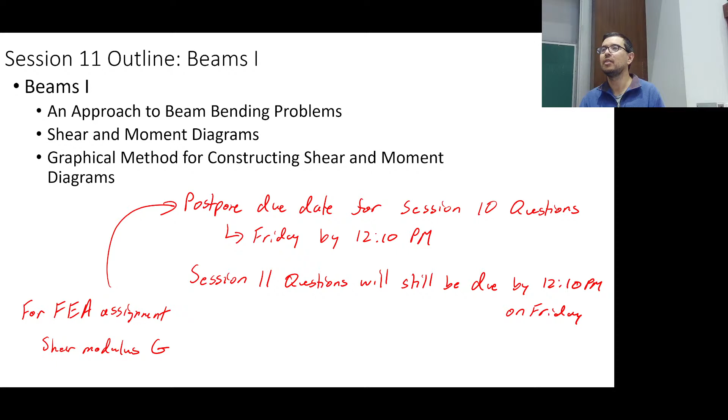Yes, Brennan? Do you take a nu value that matches to it? Yeah. So what you're going to do is use the equation G equals E over 2 times quantity 1 plus nu.

So go ahead and pick an E, an elastic modulus, something that might be, let's just say you pick 200 gigapascals, hypothetically. What do you got to do? Well, then you got to solve for Poisson's ratio, nu, using the G that you already have. And when you do that, then you can plug in your elastic modulus and your Poisson's ratio.

I got, I think, a little whiff of lunch. All right, so today, moving on, any questions on that? All right.

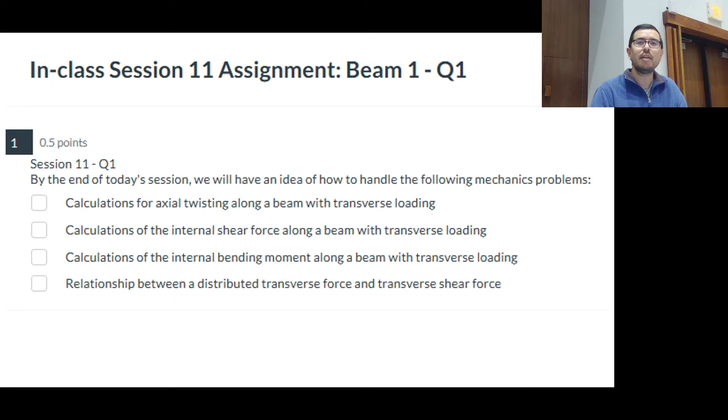You'll be able to calculate the internal shear force along a beam with a transverse loading. You could already do that, hopefully, because you were in statics. So today it's maybe a little bit of a review.

Hopefully some new insights: calculate the internal bending moment along a beam with transverse loading. Yes, that's something you've already been able to do. And we'll talk a little bit about the relationships between a transverse force and a transverse shear force.

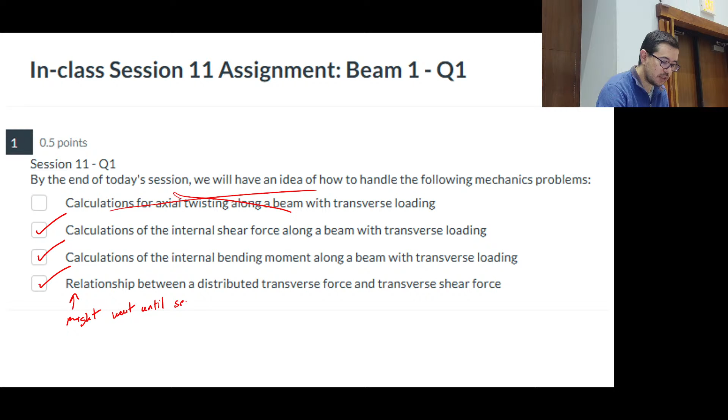So why not? Okay, so those will be, to be honest, we will cover that. Yeah, that might wait—that might wait until session 12 for more detail. But this is the path we are on. No, we'll cover it today. Yeah, we'll cover it today. Well, let me edit that—we'll say more detail to come.

Yeah, we will do that: distributed transverse force, and more detail to come, we'll say.

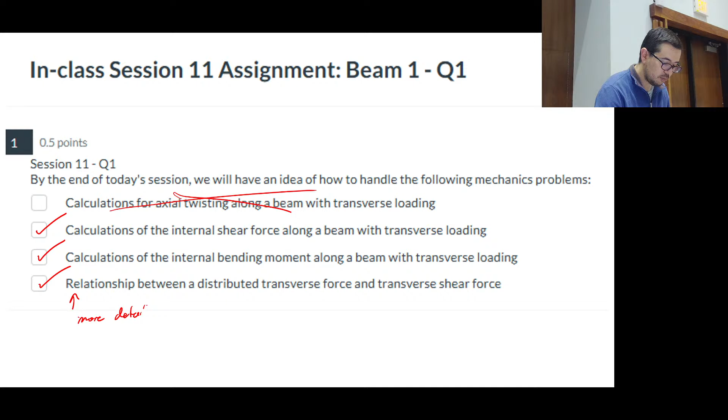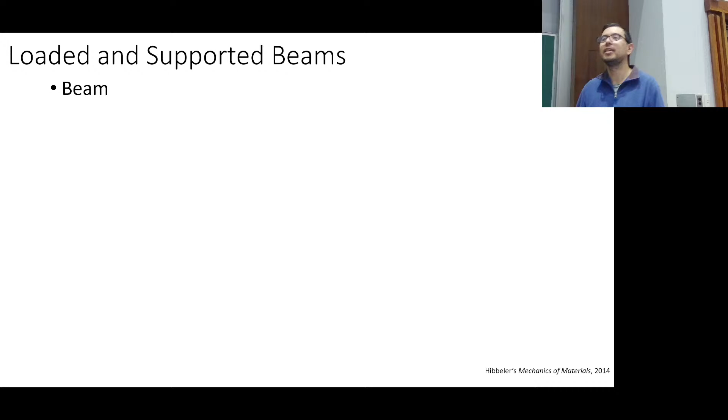So, what is a beam? If you think of a beam, how would you define it? You've spent a whole bunch of time with them in statics, so what is your definition of a beam? Essentially, it is a long object with a small cross section—we say typically that the length is much greater than the width and the height. That's how we define a beam.

It's like, oh, I go home and I see beams, or I use beams all the time. Your house, probably, if it's got a wooden truss and structure, has a lot of beams in it. Even the dorms, with a lot of concrete, have steel in them too, right? So there are a lot of beams in our residential or dormitory type life settings.

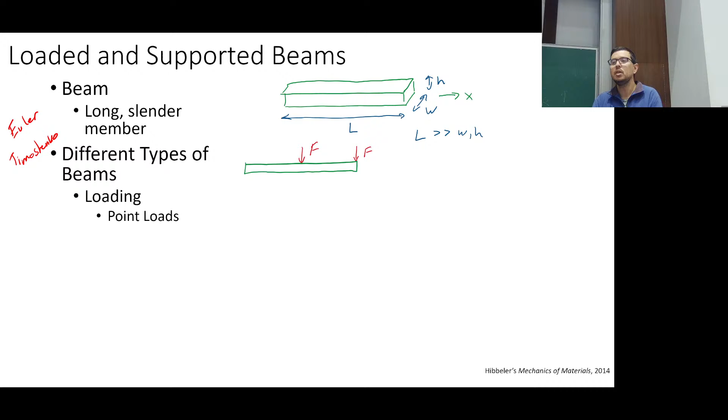The different types of beams we can consider: point loads are familiar to us. These are transverse, meaning they go through - they're orthogonal to the axial direction of the beam.

We could have an axial load as well, but we're not going to focus on axial loads in beams, because what is that? That is just a uniaxial loaded bar. But when we get to combined loading, you'll have systems with uniaxial loaded bars that are also under bending with transverse loads.

Distributed loads look something like this. I drew this distributed force, W, upward just because in our conventions, that would be the positive direction for the distributed force. In reality, gravity usually acts the opposite direction, so we often have a negative W when we do these problems.

So now we talk about the supports - those are two ways we can load it. Another way we can load beams is by applying a moment at some location. So that's not really shown here, but we can have a concentrated moment externally applied as well for the loading, although I don't have a drawing for that.

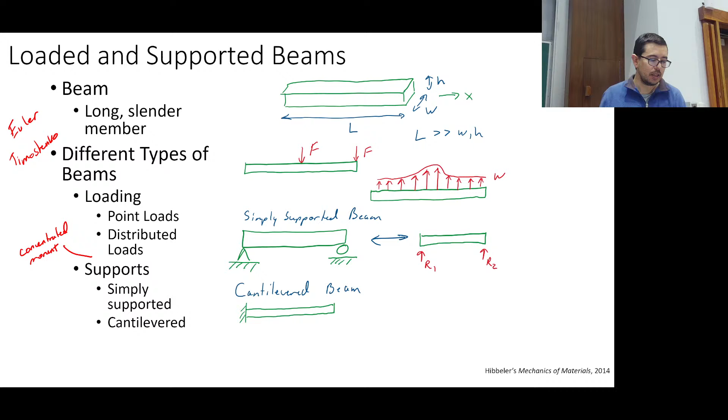The cantilevered beam is your classic beam on a wall, and then you can describe the external loads on it as such. That's what the wall does - it provides a reaction moment and a reaction force. If I were to put just a pin on this end, that would obviously mean the beam could just spin, and that's a problem.

So a cantilever beam needs to have a reaction moment, it needs to have a supporting force. An overhanging beam can be something where essentially we have a wall constraint and a roller constraint, or some type of - again I would probably put a pin somewhere along it, but that's technically not appropriate. Any questions on these different types of beams?

Yes? Is it appropriate to say a beam is technically anything getting a transverse loading? Yeah, and you know, I mentioned the plates a few minutes ago - this table is not a beam, because it's got so much width to it as it's going across. Can I make some approximations? Sure, but that's more of a plate. Here we're constraining ourselves to the idea that it's small in the 2 other dimensions.

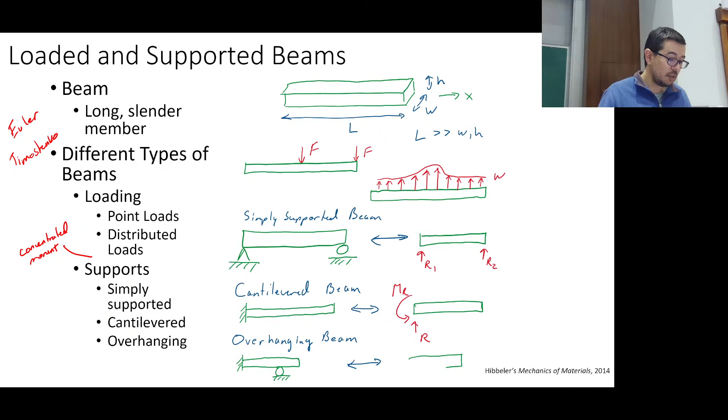Amazing things. If you think about flight, especially in aerospace engineering, it's just absolutely amazing to see what they did.

Okay, so section of a slender member. There is a member. It is not that slender, given how I drew it, but you get the idea.

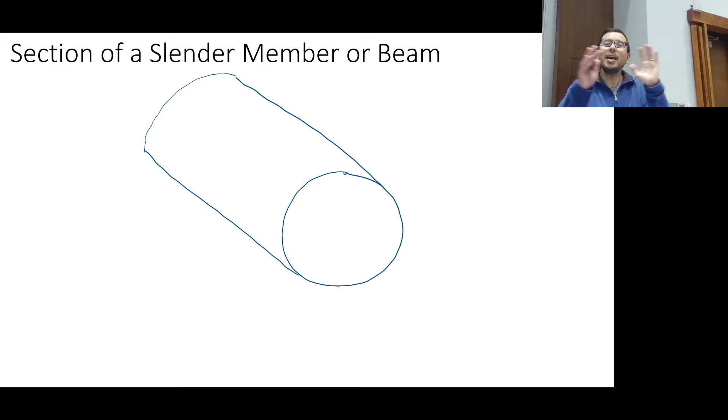So if we think of the internal loads here, what could we be talking about? That's a very vague question. Let's imagine that this is one of my slices, the way I draw my slices, right? And I'm looking at it, I just sliced the beam, and I'm looking at the open face.

What do I see if I want to think about the internal loads? What are my options? This is now not just transverse loading. I'll take whatever type of loading you can imagine. What would I see in that slice?

Yes, shear. Okay, so I could see shear. Very good. All right, so let's go one step further.

Now I give it a coordinate system. Okay, and yes, this is pre-programmed. But we're not talking about stresses here, right? We're talking, there are only two types of internal loads we're going to discuss right now. One is moment, one is force, okay? So what would a shear force look like, and how would I draw a shear force here?

Yes, so good. I would draw it parallel to the face, something like this, parallel to the face, and maybe in the y direction, maybe in the x direction, maybe in some other direction. But I wouldn't draw it if it's a pure shear force, I wouldn't draw it in the z direction, assuming this slice is in the xy plane.

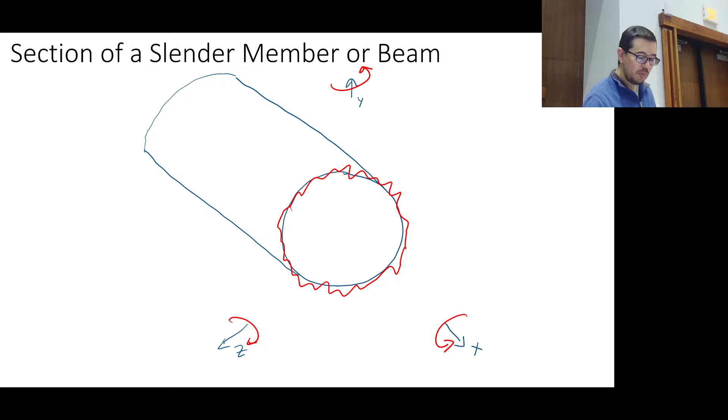And you're also getting at something where I could have torques. I could have moments that are causing essentially bending or twisting. So the way we think of X, if you think about a torque here about X, what is that? That should look familiar, right? That's torsion, that's just twisting this thing like we've been doing. Okay, if I have that, so that's this one.

What are Y and Z? Think back to your statics. What are they really? Yes, bending. Yeah, those are internal bending moments.

Okay, we're not drawing the nice 2D diagram here, right? But if I were to slice this thing like this, okay, this could be - and I say that Z is coming out of the board - that's just an internal bending moment, that's this one right here. And then this one is about Y, an internal bending moment about the Y-axis. Okay, so very good, very good.

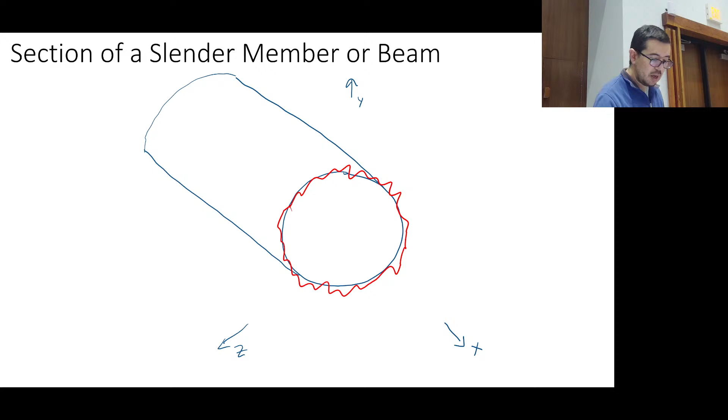All right, so let me just put up the pre-programmed thingamabobber, all right? But I will add that, yes, the slice shown is in the YZ plane. Sorry about my mistake, won't be the last time this semester.

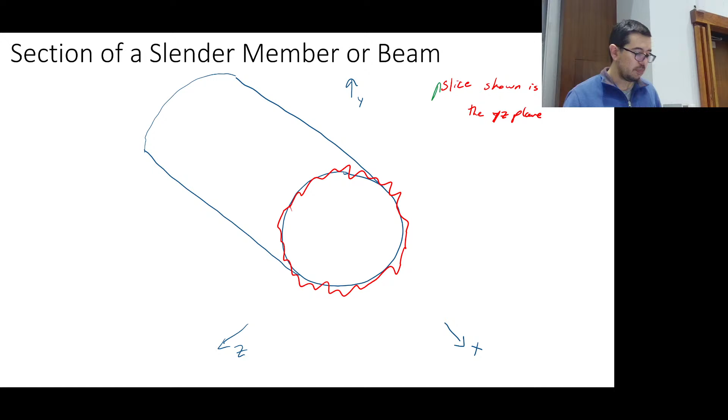Okay, so we've got axial force, Fxx. We've got our shear forces, Fxy and Fxz, right? We've already seen this - I remember these orders do not matter too much, but what we're saying is... oh my goodness, that's the X face in the Y direction. That's correct, and this is the X face, this is the X face in the Y direction, and this is the X face in the Z direction. Okay, those are shear.

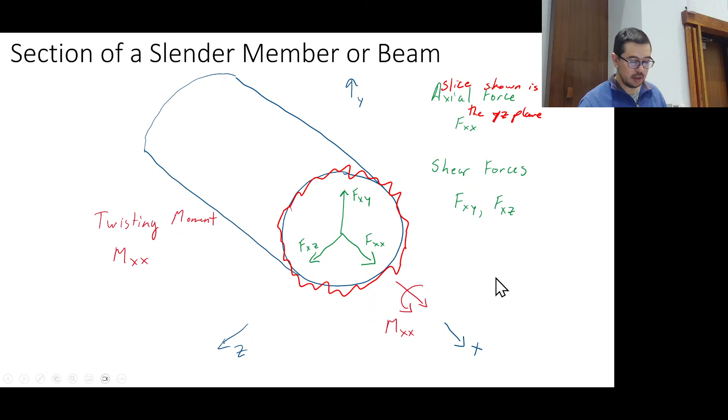So those are our shear forces. We can have a twist, which we call MXX, or MX if we'd like, and that would be similar to the torque that we've seen. And we can have our bending moments, MXY and MXZ, like that.

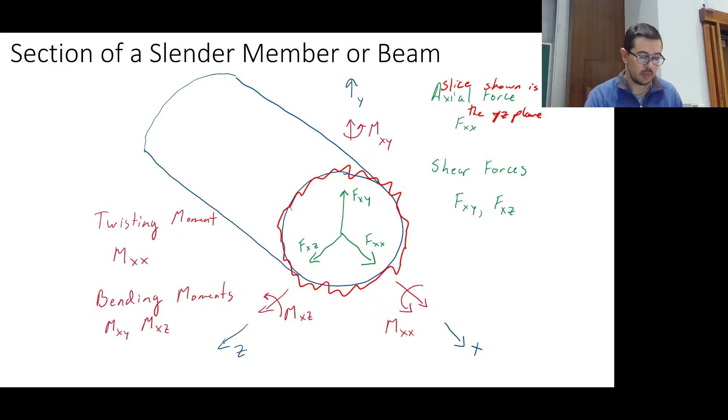So, what's happening inside the beam? We can have varying internal shear forces. We can have varying bending moments.

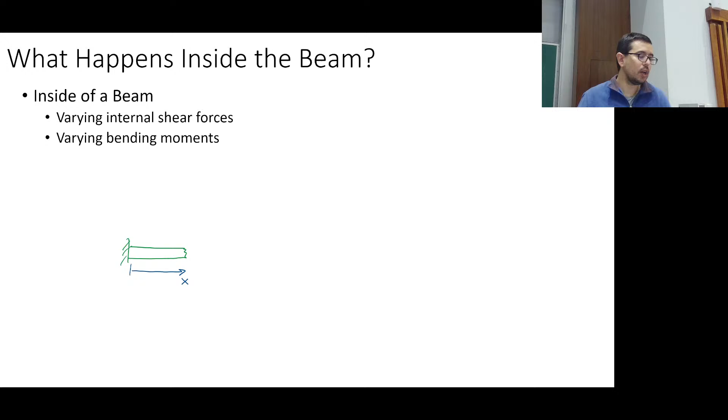So this is now jumping to the idea that we're dealing primarily with 2D structures, and we do not have twisting. So we're saying no twisting, and we also do not have axial loading.

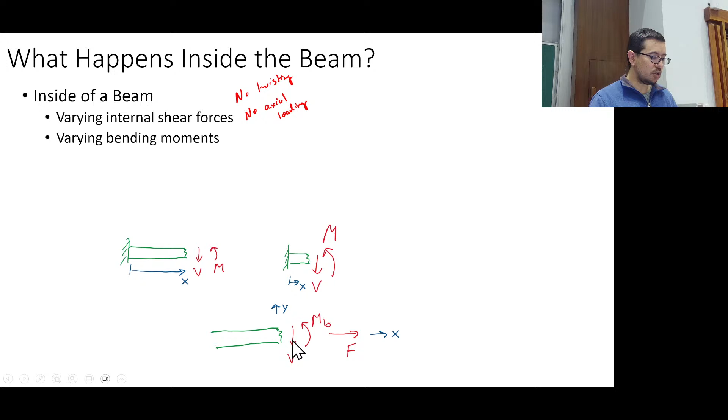So here, what you did before, using the convention from Hibbeler, is you would draw an internal shear force, which we give by V, and an internal bending moment, M. It's important to try to get the convention straight so that V is down this way and M would be going up like that. And yeah, we could have an axial, but let's just say we're not thinking about that right now.

Any questions on this convention? We've already talked about this a little bit. In terms of, if you have it open to the right, then V is downward. If you have it the other way, and we'll do this again, it won't be the last time, V is up and M is this way.

So Crandall, Dahl, and Lardner also have an approach to beam bending problems. We've talked a little bit about their approach to static problems, where we have equilibrium, geometric compatibility, and constitutive relationships. If we look at CDL, they also essentially have a 3-step process for handling just equilibrium.

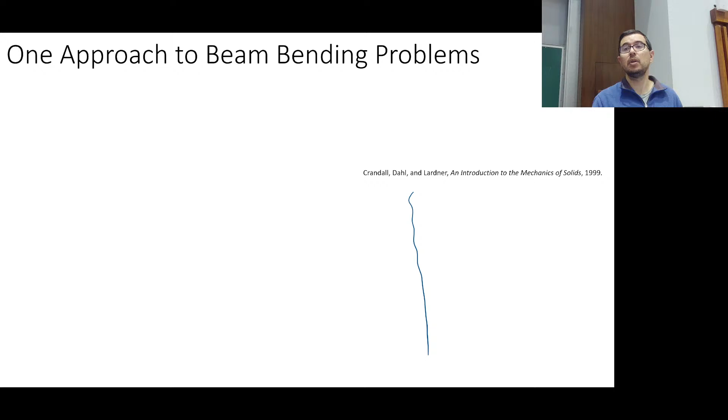So you are going to create the model, and that's you kind of, I don't know, that's you want to do that. Idealize the actual problem.

And actually, this is not super trivial in that, so as we were undergoing our ABET accreditation, one thing ABET wants us to keep track of is certain student outcomes, and there are 7 student outcomes. The first one, if you look at the syllabus, you'll see different student outcomes listed, and the first is the ability to identify, formulate, and solve complex engineering problems. So this goes right along with that.

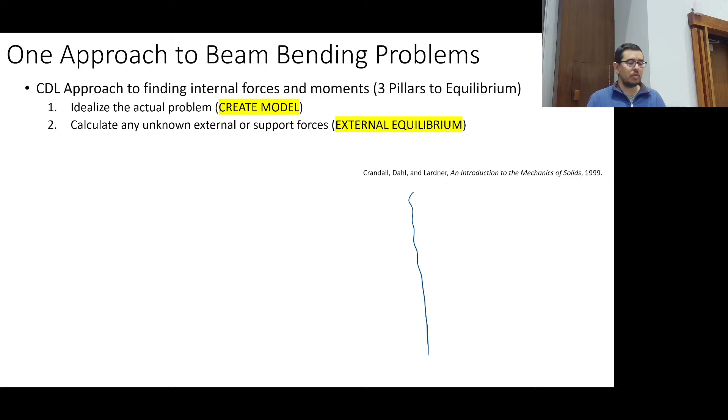We want to go ahead and identify what the problem is. Then we will use external equilibrium—we've talked a lot about this—and then we will use essentially the method of sections.

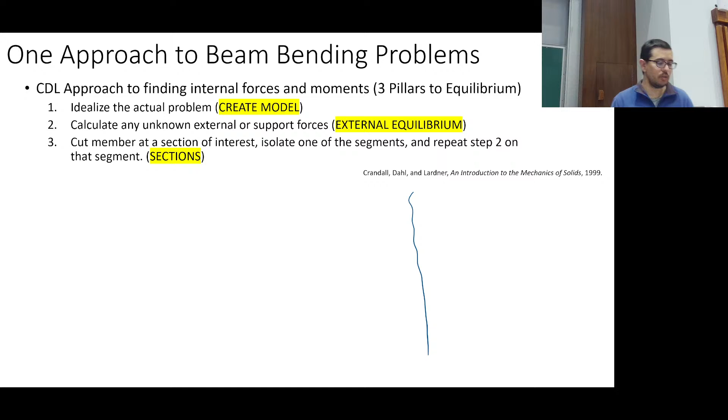So these are not earth-shattering approaches to beam bending problems. I think you've probably already used them in the past, but this is just a reminder. So creating a model might look something like making a drawing, putting a load on, doing a better job of describing your coordinate axes than I've done here.

Then also putting forth what the corresponding external loads would look like in terms of vectors. And then we can move on to external equilibrium, where we write out equations. So we know that R and P are going to be equal to each other here.

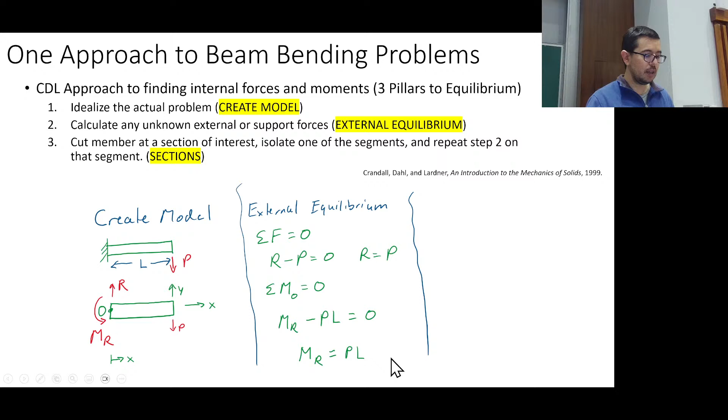And we can then select a location about which we take the moments and sum them and set them equal to zero. So in this case, I've gone ahead and specified this point O, and that's where we're taking the moments, and we have here—you've seen this a lot of times before.

And then in terms of sections, we take a slice and we look at the internal shear force, V, and the internal bending moment, just like you have here. Any questions about that? Any insights that you might have that would shatter my world?

Does anyone like beam bending problems better than other types of problems we've covered, like torsion? No? I don't know, I think I like beam bending problems better than torsion problems, to be honest. But that's just, maybe it's just me. I have issues knowing which direction we're going.

All right, and yes, we can go ahead and solve for the internal shear force, V, and solve for the internal bending moment. We'll do more of this in the future, but you've been familiar with creating those shear force and bending moment diagrams, where you say how the shear force is varying across the beam, and how the bending moment's varying across the beam. This is just getting us started. We do have a nice expression for V, and we do have a nice expression for M, and in this case they just happen to be constant. So that's very nice.

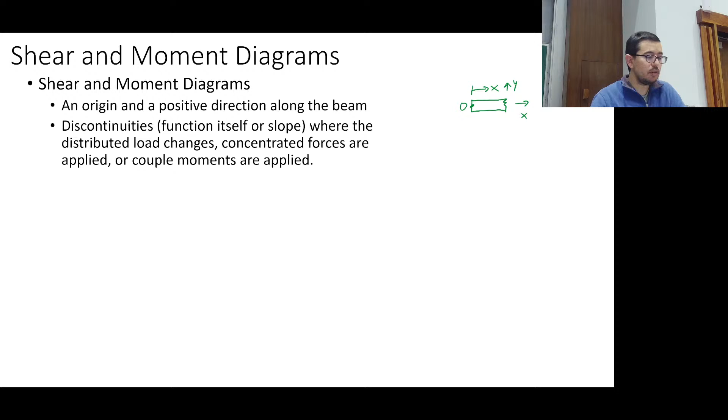So here we go. All right, we have an origin and a positive direction. We might have discontinuities along the beam, and that could be from a distributed force changing, could be from a point load being applied or concentrated force being applied, and you can also have these moments that could be applied to the system.

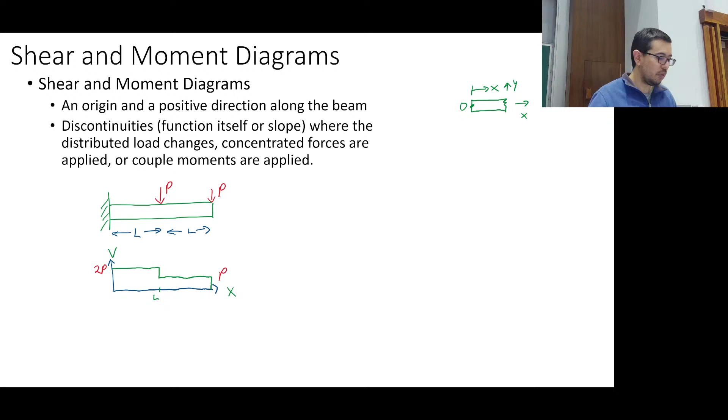Okay, so here's kind of an example where if we're going to draw out what's happening across the beam, it would look something like this, like such. All right, we've done these before, and we'll go into more depth. This is just giving us a little familiarity with what it looks like. Okay, like this.

Dudes and peoples. No, you cannot do it this way. No one told me that was wrong. I was thinking about it though.

All right, so here, let's do the sum of the moments about O equal to 0. So if we do it at O again, what we're going to have is V and M and MR. So MR, let's say that's positive. So we have MR positive.

We have a minus XV, right? That's going to be negative. And we have a plus M equal to 0. So in this case, M is going to be equal to XV minus MR.

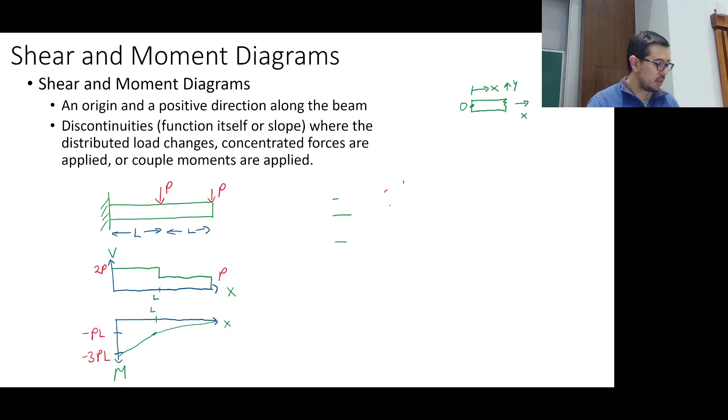So, sign conventions. Well, the distributed force, what are units of distributed force? Yeah, newtons over meter, force per length, right? Thank you.

Okay, so what we're going to look at here is saying, hey, there could be some delta F's between, say, this spot and this spot, over some finite delta X. And then we're going to make that delta X smaller and smaller and smaller. And so that limit's going to go to 0.

And that's what we're going to find as our distributed force. Now, distributed force W could be a function of X as well. And we're going to define it as being plus or positive when it's in the positive y direction.

You know, maybe some conventions here, we're already familiar with. Typically, we take a slice and we have an axial load on that bar. Then it's going to be positive when it comes out in the x direction. And so if we took a slice and we go in the other direction, then we have positive like this too.

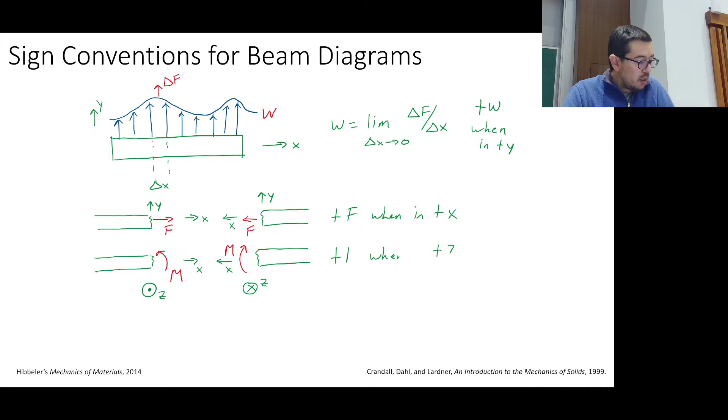Similarly, or dissimilarly, with V's, I don't have a very good way to remember how those go. But we do define V to be positive when it's going downward, when we cover up the right, as Jeff Hansen says, and we define it to be positive upward when we cover up the left. So these are the conventions, and we hinted at them earlier. I think I've said it before, I was confused by CDL and Hibbeler's disagreement when I started teaching the class.

We'll talk about them today and we'll kind of derive them. Have you seen, did you do these before? In statics, do they give you these equations? Yes, no, maybe, yes, good, okay.

We'll go on to explain how these come to be, but these are two that you definitely want to know. So what we're saying is that the derivative of the shear force with respect to x is going to be equal to a distributed load, and the derivative of the internal bending moment with respect to x is going to be equal to the shear force.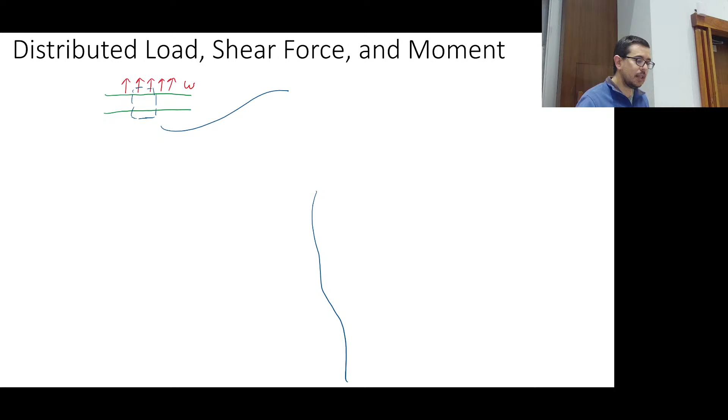So here's a distributed load, W, and then we take a little section, right? And it looks something like this. So what do we do? That's a distributed force that we said is W, and it's positive. This is a beam, that's the green part, and we're saying let's just take a chunk out of that beam. That chunk of the beam is going to have some width, delta x, down here.

On the left side, I can describe some internal shear force, V, and I'm going to draw it upward because that's the convention. I've covered up the left side, so now I have to draw it upward, and I will also draw a bending moment, which gives us a smiley face - that's how I look at these internal bending moments. I have a distributed force applied to this chunk, like this.

And we have our right side now that we will also say has some shear force on it, and some bending moment on it, and it's going to be a little bit different. Why? Because that delta x is on the small side. So when we've got that small amount of change, we don't know what it is right now, but we're going to try to figure it out using equilibrium.

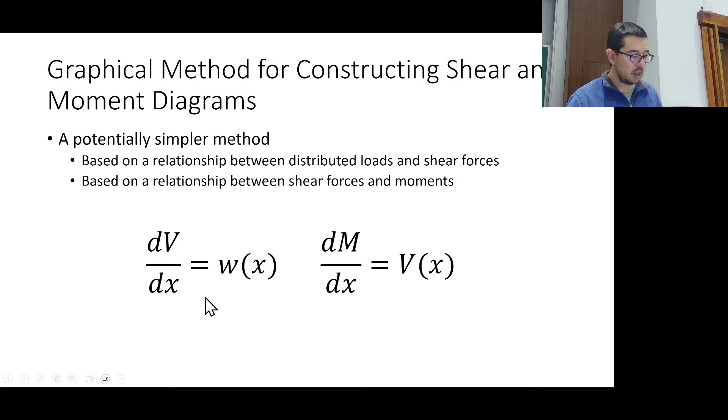Let's look at the derivation for the one on the right. So we have the summation of the moments at a location O, specified here. And we'll say, all right, we've got M plus delta M, that we'll say is acting in the positive direction. We'll say this is acting in a negative direction.

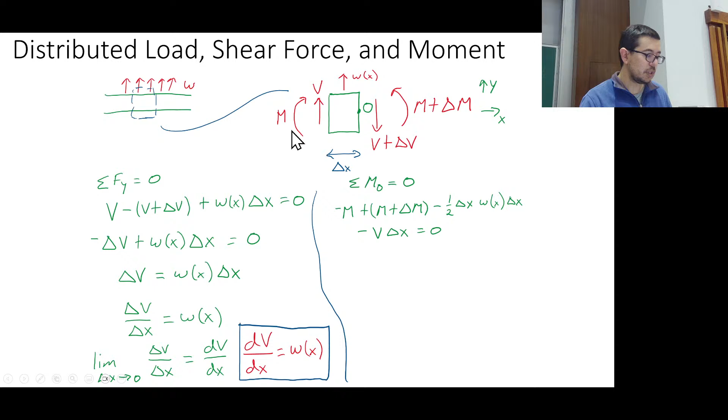We have - someone want to explain where did this come from? What is this term? What do you think? Yes? The distributed force over delta x. Okay, so which part is the distributed force over delta x, and what does that mean?

Yes? Okay, I understand that. So how is this moment calculated? Because this is a moment equilibrium, so you got it right, but you want to say what's going on here. Yes - shear force times length. All right, so there's not a shear force written in here.

Okay, so you're saying the derivative of the shear force, you're plugging this into here. That's interesting. Without looking at what's on the left side, how would you describe that equation? Where does the 1/2 come from? What is that equation doing?

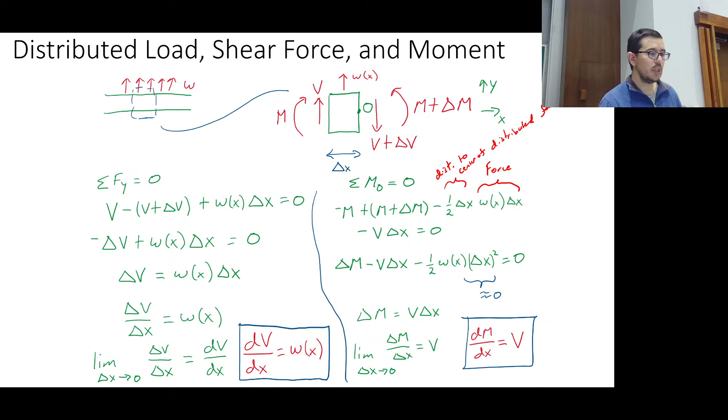So then we're just left with these two terms: delta m minus v delta x, delta m equals v delta x, and that is going to be our relationship. dm/dx is equal to v. Okay, so those are the big two relationships that we can use when we're looking at solving for internal forces in beams and internal moments in a beam. Okay, any questions about this? Okay.

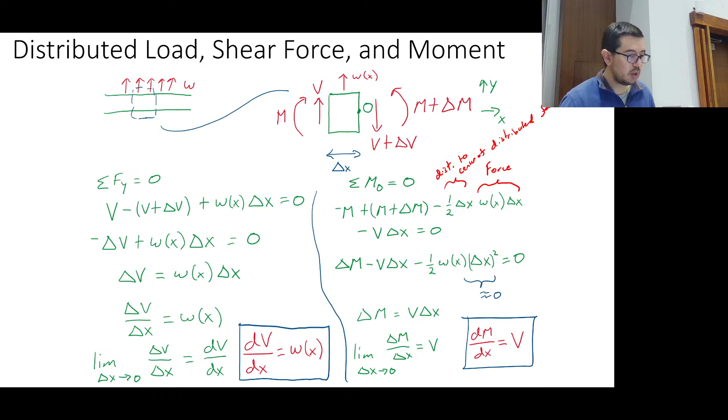So let's look at what these equations, both of them, mean in English. It means that the slope of the shear force V as a function of x is equal to the distributed load W at x. All right, well that's nice, I mean that's nice, but that's also not. Those are just words, and if you said that to someone on the street, they would not look at you very interestingly, or they would look at you interestingly and then walk away. Awesome, okay.

What does this mean in the context of... whoops, this is not, it's all going back. Okay, well, okay, yeah, we'll just put it in English. We'll talk about that. All right, the second equation in English is: slope of the moment m as a function of x is equal to the shear force v. Okay.

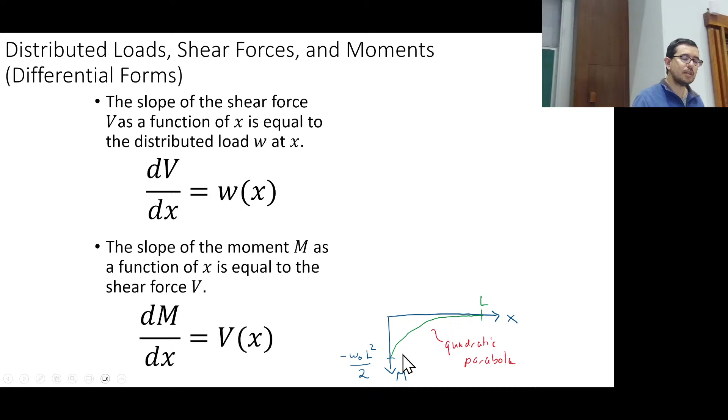So if now we draw the moment, okay, all right. So let's go back here. This is a system that has a quadratic, right? And if this is a quadratic, it's a second order polynomial as a function of x. If I take the derivative, so this is moment as a function of x. If I take the derivative of a quadratic, something with an x squared in it, or a minus x squared as is the case here, I'm going to get something that's just a function of x, right? The derivative of x squared is 2x, right?

So what this is saying is that the shear force is the derivative of the moment. So we can begin to look at what's happening here and say, okay, this is second order, and then it goes to first order.

Now wait a second, if I have shear force and I take the derivative of it, and this is first order, what does the derivative of a first order expression become? Yeah, it becomes a horizontal line, right? Or it's a constant, right? Often equal to 0, but if it's an indefinite integral, well, it could be any constant, right? The derivative of any constant is going to be equal to 0. Okay.

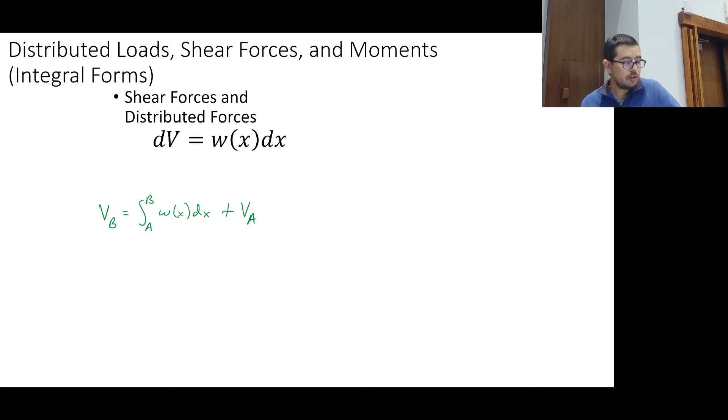Now let's look at it exactly like that. If I have a shear force and distributed force, I can take that equation and say that dv is equal to w dx. Then I can integrate, say, between a and b, and I can get some type of expression for v.

So this is just putting this out there. And same thing with bending moments - I could take an integral of the shear force between a and b, and that's what we could call a delta m, which is this integral of that. Any questions on this?

This is starting to approach something that maybe is a little different perspective than what you did when you did these problems. Because what is the default? Let's be honest with ourselves - if someone hands me a beam bending problem on an interview, which I hope they don't, how would you do it? Are you going to sit here and do these integrals? You think so?

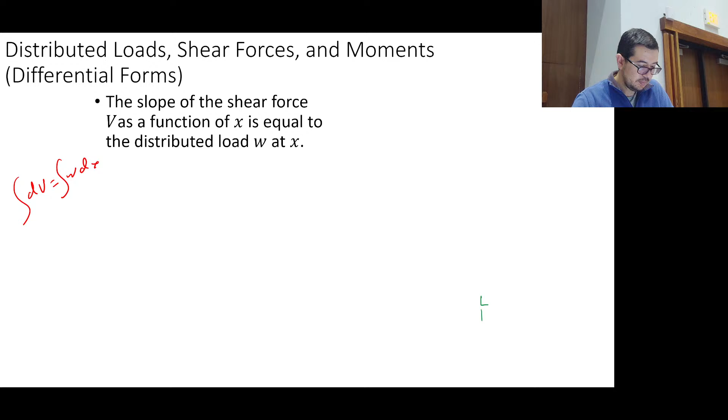I think I'm going to just do equilibrium on the beam - that's how a lot of us would do it, because these expressions are true. I mean, depends, but at this point what you'd probably do is essentially what I just did wrong, but then saw needed to be corrected, all the way back here.

This is how you've done it - when I say this bit right here, you can get V and you can get M by free body diagrams. You don't need this fancy dancy new calculus-based approach.

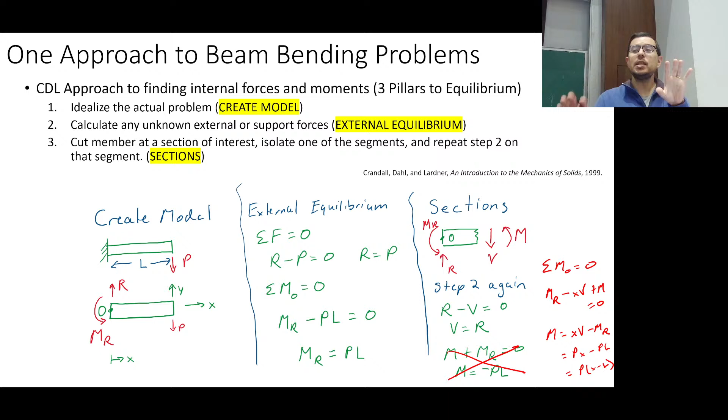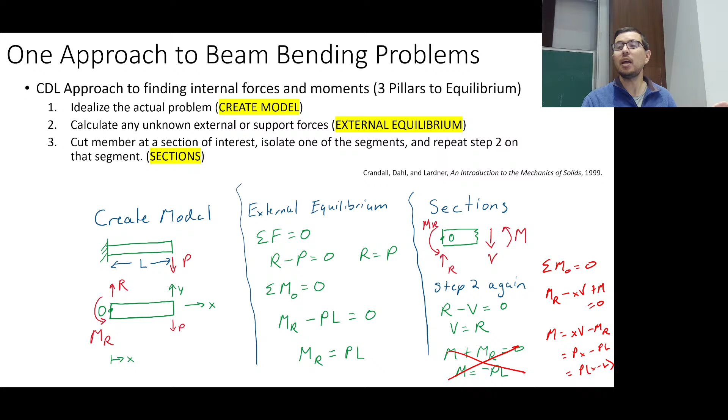But there are cases when the calculus-based approach is useful, and that's what we're going to try to get across today. Any questions or thoughts? You can do what you did last semester, and if you're trying to do something quick, that's what I'd suggest. But if it gets complicated, or there's a distributed force involved, then you want to use these newer relationships that we're describing.

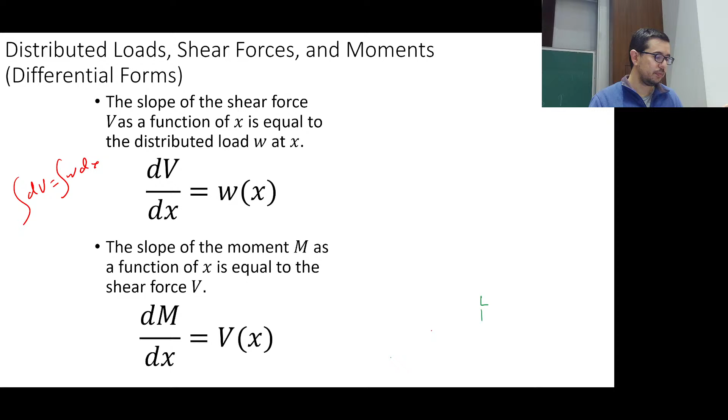Using this information, we can say the integral of this function w, which happens to be a constant and a negative value, is going to have a negative slope. We are going to write out that the integral of that is going to be a slope line. How do you figure out this value and this value? Well, that involves using boundary conditions, because this is essentially an indefinite integral, so you need something to set your constant, your plus c.

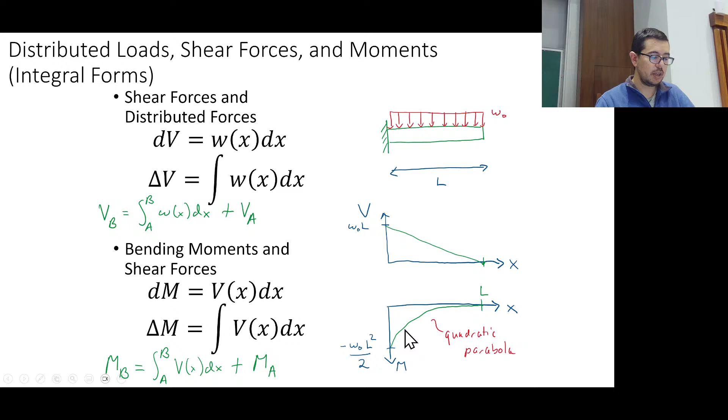And then taking the integral of this is going to give us a quadratic, and again you'd want something for the boundary conditions - we'll talk about how to do that in the future. So here is the future.

Here's the methodology. Step 1, you want to calculate the external loading first - get the values of shear at the ends of the beams, and establish the moments at the end of the beams. Step 2, use the differential and integral forms, and you can get a shear diagram and a moment diagram. So what are we talking about?

When we do the external equilibrium, don't bother with the distributed force - figure out where that effective force is and use it at its appropriate location. In this case, that's halfway across the beam.

Then, after we've got these calculated, so now I've got my effective force, W naught L, I have my moment at the left side - that's a reaction moment. Sometimes people will put M sub R, but I didn't, because it's acting at what we'll call point A. Now I've got these reaction moments, or reaction moment and this reaction force, and I am going to draw - I want to use this handy-dandy expression I've got, which is that dv dx is equal to w.

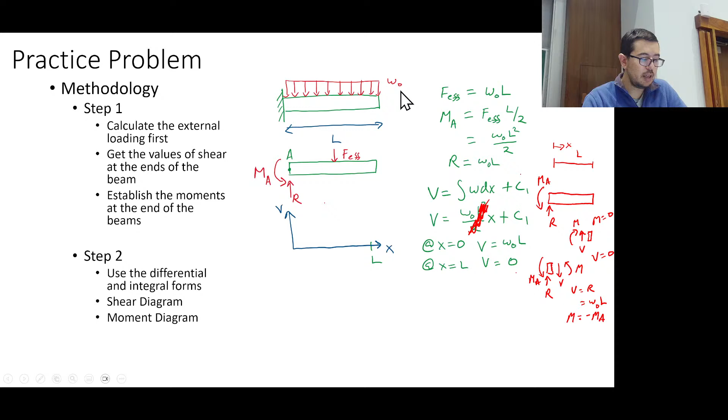What is w? Well, it depends how you define it, but w is just a constant, w naught. You could say w naught is a negative value if you want, because it's going downward. So when we integrate this, we get w naught x plus c1. We can say at x equals 0, v is equal to w naught L, and at x equals L, v is equal to 0.

Now, how do we do that? How in the world do we do that? This is how you do it. You say, I've got to figure out what, well, I've got my external equilibrium that I've drawn out here. I figured out what R and MA have, right? So MA is this, and R is that.

Then for the right side, you say, I am going to take a little slice here, and I'm going to expose the left side, and then use my convention for V and my convention for M here. Now there's a distributed force acting on it. Well, that distributed force right up to the right side is nothingness.

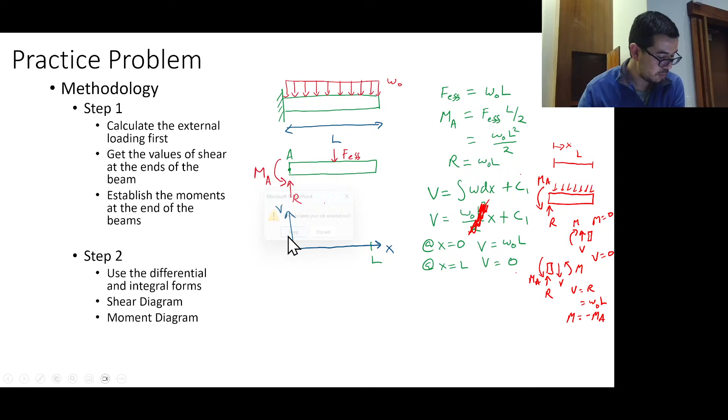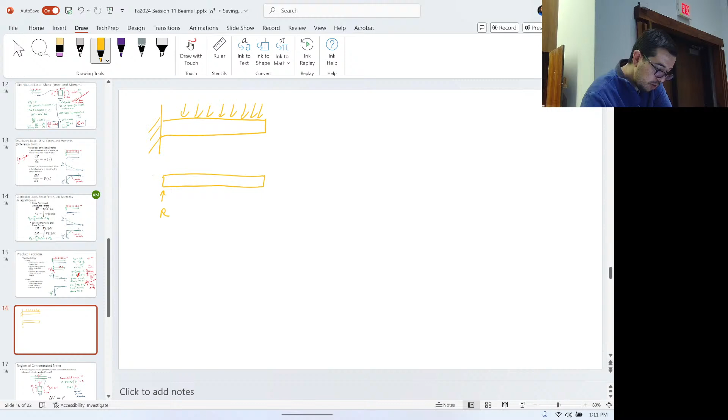This is the distributed force. This is the beam with external loads drawn. And the way we did it here is that we said that we had R and MA. So we have R and we have MA, like this. We can say that there's an effective force here, sure, that's fine.

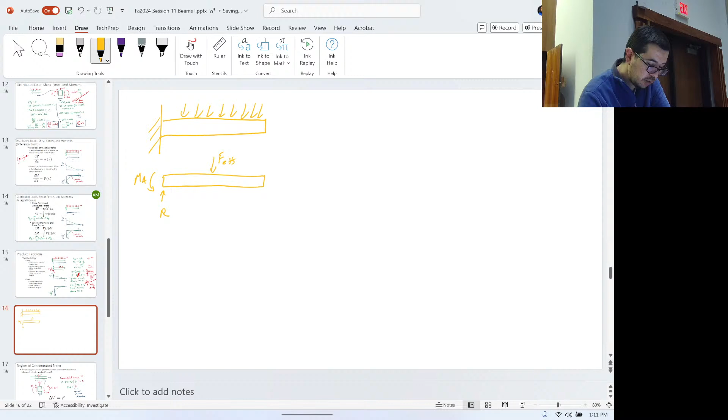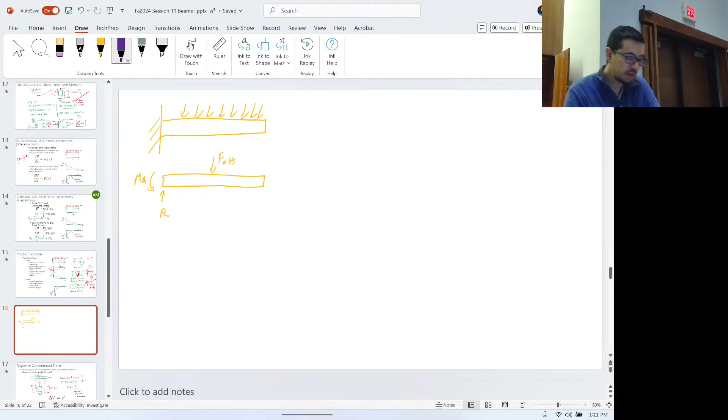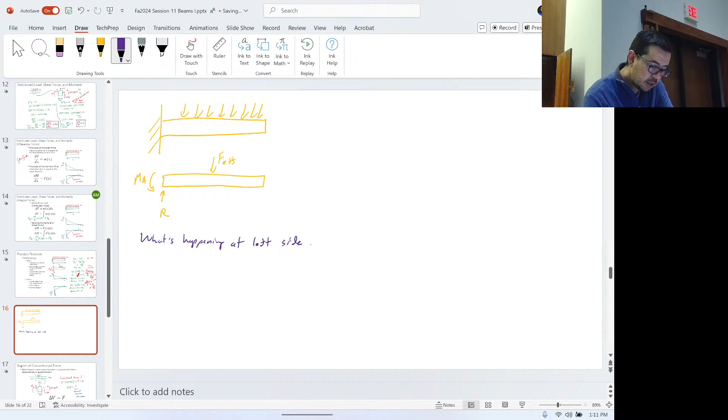What I'm talking about is trying to figure out what's happening at the boundaries. This is going to be something that you do over and over again. Boundaries meaning what's happening at the left side, internally, and what's happening on the right side, internally.

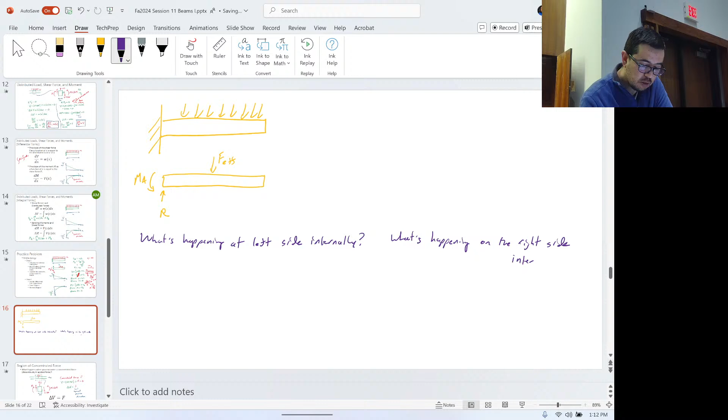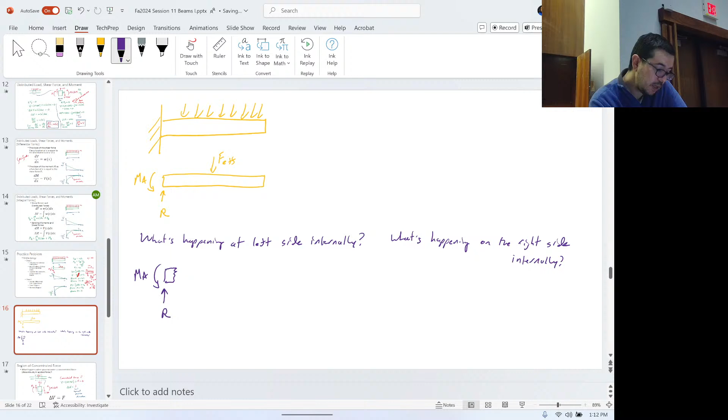So for this, I would draw a little slice at the left side. And this is going on the left side, it has an MA. And on the left side, it also has an R. And if I use my convention, I have an M. And if I use my convention, I have a V acting downward.

And what I'm saying is that it's a slice that has essentially virtually no space at the left side, so there's no distance essentially there. And I want to know essentially the M internal left side, and the V internal left side. This is another way of saying, if this is the x direction, what is M at 0 and what is V at 0.

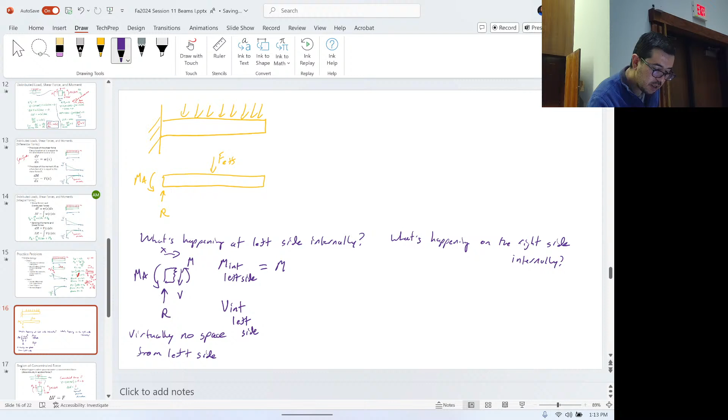So what is that? What is M of 0? What is V of 0? Well, usually the forces are easier to do first, but it doesn't really matter. So what is M? What is V of 0? There's no, you don't have to use any calculus here. I'm just saying look at the diagram, use it as a free body diagram.

What is it? No, it's not 0. It's all equal to R, right? Look at the diagram, right? You have an R here. This is why we're doing this. I'm glad you said what you said, because the R is causing there to be a force on the system, right? And now this is going to be equal to R.

What about M of 0? Do you want to, with your hand? No. Okay, almost. It's minus MA, right? Why is that? Because if you do the equilibrium here, this is saying that we have MA plus M is equal to 0. So M has to be equal to minus MA.

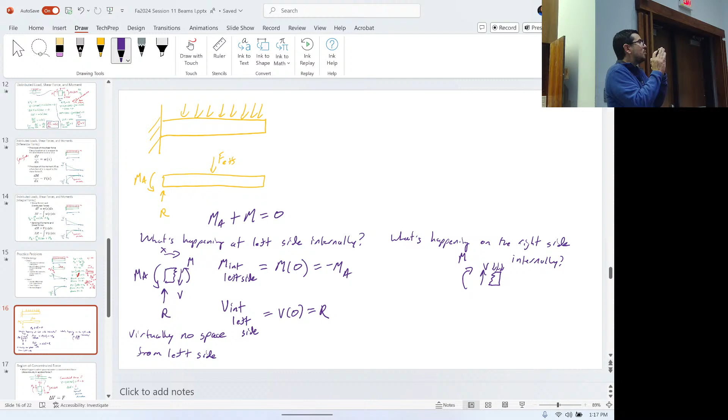So that's the question. Is there a reaction? Is there external load here? You say yes, but no. Why would I say yes, but no? Yes, there's a distributed load, right? There's that little distributedness going on here. But what is the length over which that distributed load is acting? It's 0, so that distributed load has no material on which it can act and do anything.

Okay, so now your math answers apply. V is equal to 0 and M is equal to 0, for this type of situation, because there's nothing else acting on it. All right, any questions on what we just did here?

So why is this important? It's important because we need to set up, yeah, we need to set up. I said it's just minus MA and R, but you have to solve for those. The MA, well, we can do it.

The MA is just going to be F effective times what? L over 2, right? And what is F effective? Yes, I see W not L. All right, so MA is just W not L, and then it's times L over 2, so it's like that.

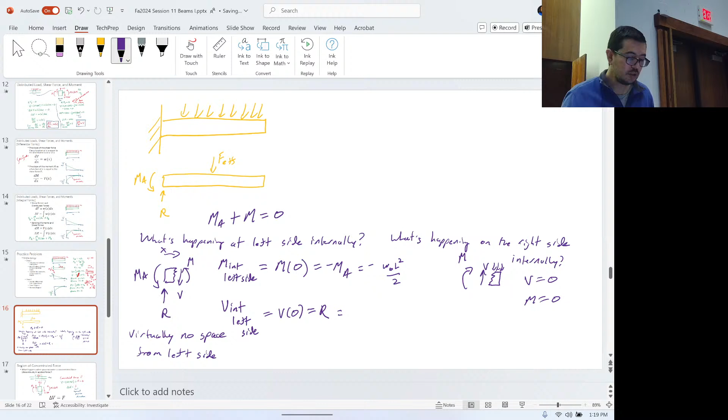All right, and then R is V. But V is equal to? R is equal to F effective, and F effective is just W naught L. Okay, any questions on that?

We're good? All right, so once we have those boundary conditions appropriately laid out, we can go ahead and start to draw these diagrams. So you see, I know that this has got some slope to it, and it's got negative slope because W naught is negative here, because it's in the downward direction, so it's a negative slope. So the slope here is just minus W naught, the way this is defined, and it's going downward, and this is just 1, and it's got to be up at W naught L, and when it gets over here on the right side, we already said that V is equal to 0.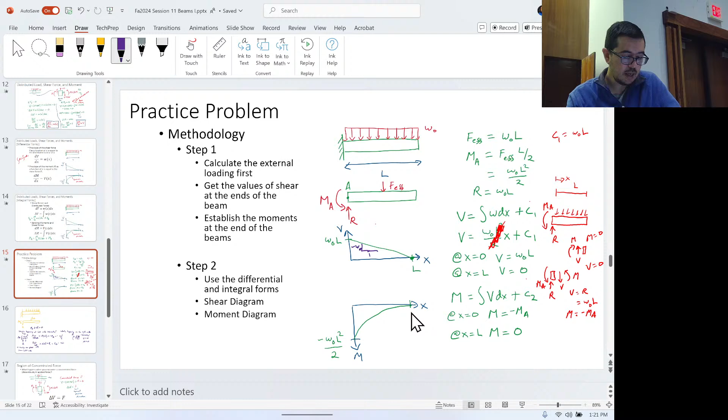So if you're drawing these out, the integral tells you what the shape of the graph will look like, but the boundary conditions tell you what's happening at the left and the right. Similar here: M of 0 we said was minus W naught L squared over 2, and then it's going to be equal to 0 on the right side.

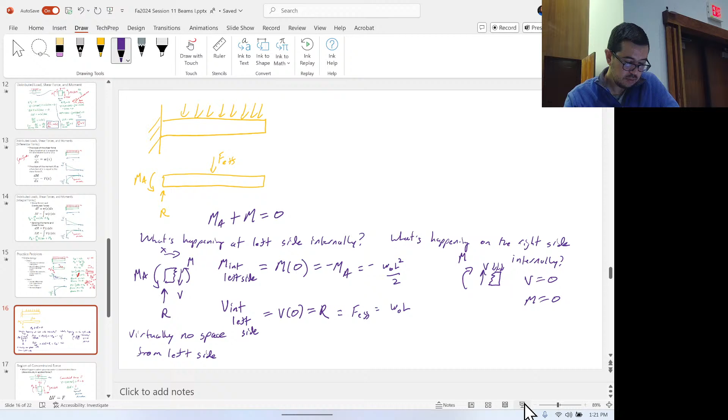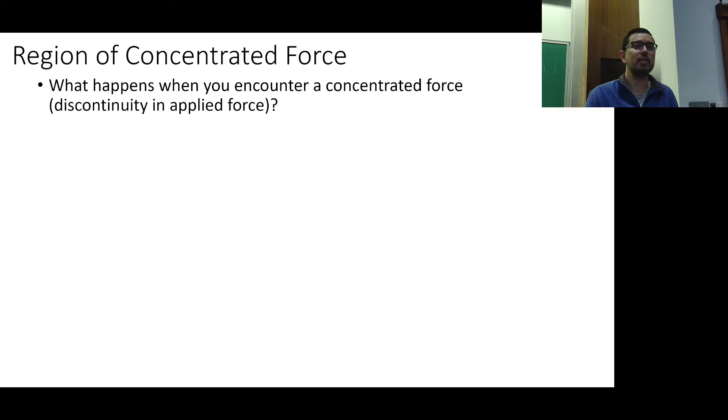Now, what happens when you encounter a concentrated force along the beam? Usually some amount of increased anxiety on my part, but other than that, once you know how to do it, it's not that bad.

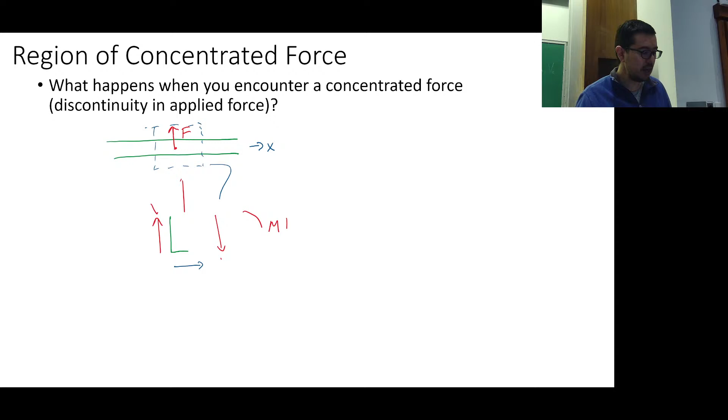Okay, so here's an applied force across a beam. Now we'll go ahead and we'll just break it down like we did before. So we have our force, we have our internal V, we have our internal M, we have our V plus delta V, we have our M plus delta M. We look at the effect of the concentrated force in the equilibrium, on the equilibrium. So we have V, we have minus V plus delta V, and we have now a new plus F. And we look at its effect. Well, okay, so that means that delta V is equal to F.

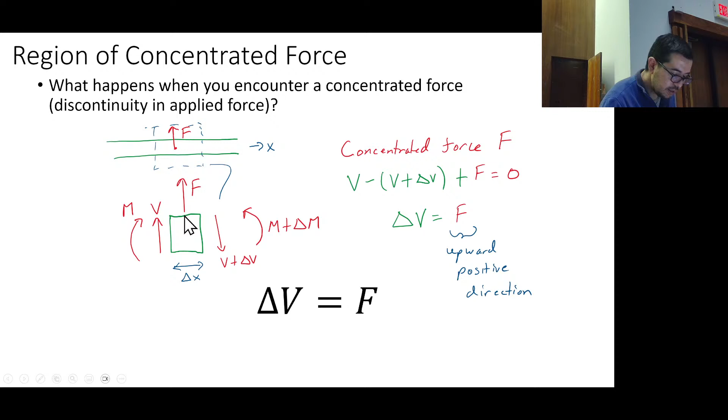And then we look at its effect on the moment. Oh, I didn't do that part of the derivation. Well, anyway, when you do that part of the derivation, you see that for a moment, and let's just say we put it over here, you're going to have an F delta X over 2.

And that is going to end up being a small amount. Because you have M, plus M plus delta M, okay, let's do it out. So we do the summation of the moments: minus M, plus M plus delta M, minus F delta X over 2, and that's equal to 0. So delta M is equal to F delta X over 2.

And since this is a small quantity, not like delta X squared like before, we usually say that this delta M change is about 0. This is how we do it. It's not a significant change in the moment, so we ignore it. So the equation you need to recall is that delta V is equal to F.

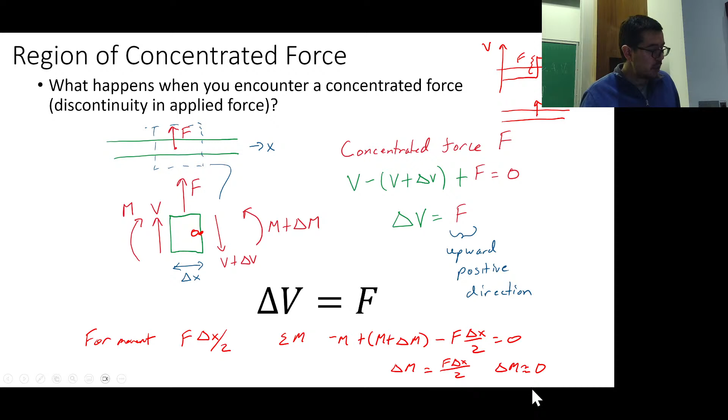The region of a coupled moment: when you have a moment being applied, then we have something that looks like this. Now, if I said that y was in the vertical direction, which direction would z be? Y is vertical, right? Z is coming at you. Yeah, right hand rule, like this, coming at us.

So is M app positive or negative? Well, it looks kind of negative. So this is one of the weird things: when you pick a convention, you have to stick with the convention, and sometimes sticking with the convention means awkward things happen. This is one of them. So when you see the M app in this direction, you might think, oh, that's going to be a negative change in the moment. No. If you go through the derivation, which we'll put up here quickly, the change in the moment at that location...

So if I'm looking at a plot of my moment as a function of x, this would be a jump of delta m. That would be M app, the jump from here to here. That's a positive. And it's also very important that we keep in mind this is going from the left to the right. We'll go through more problems on this in the future. Because you could say, oh, if I go from the right going left, it goes the other direction. No, this is coming from the left going to the right. This delta m is equal to M app.

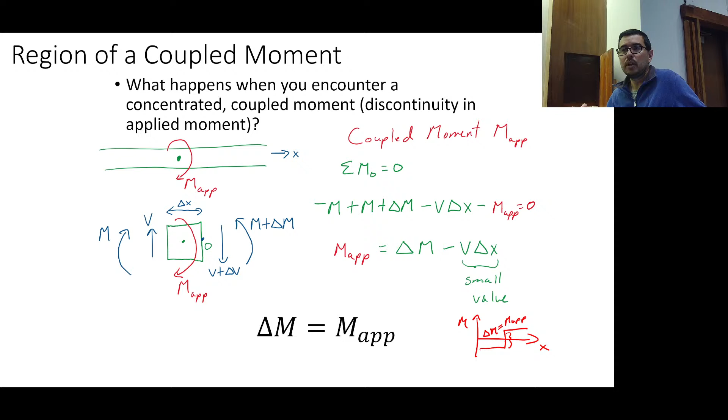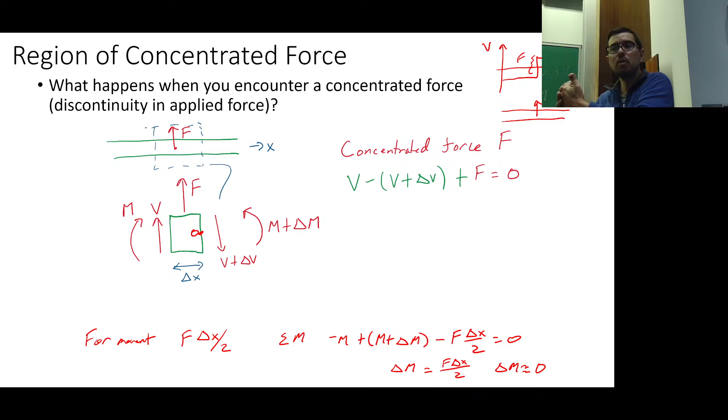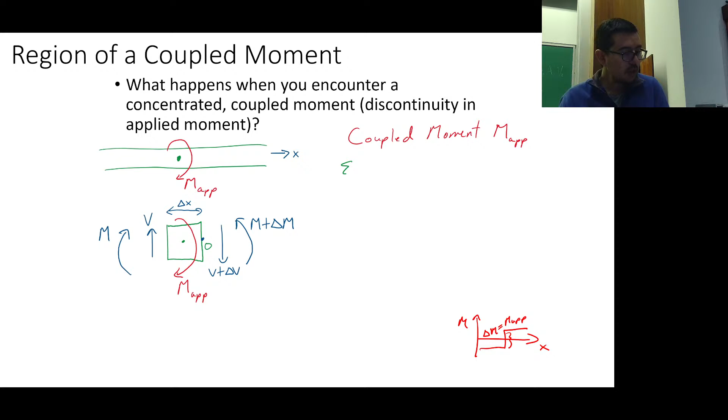Yes, I understand. But it's also probably a good time to point out that we're talking about relationships between external loads and internal loads. So like this region of a concentrated force, that's an externally applied force, but it has an effect on the internal force, internal shear force, right? The externally applied moment has an effect on the internal bending moment. You're not going to be able to see the internal bending moments, the internal shear forces, but what you can get a feel for is the external loading that you apply. And we're trying to figure out what the invisible essentially is doing.

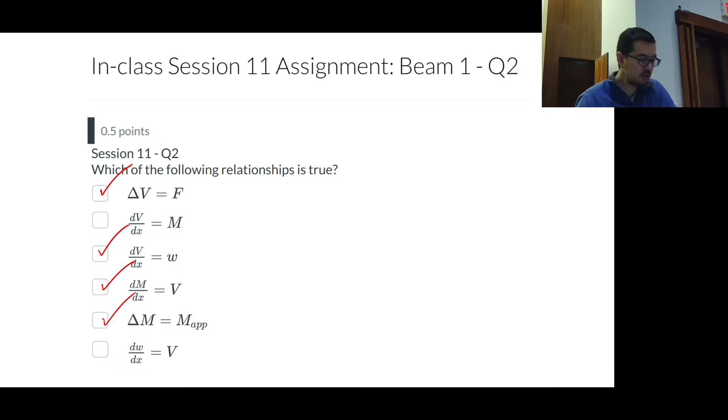All right, we've gone ahead and looked at how to do these types of problems. There will be more to be done. That's all you have to do.